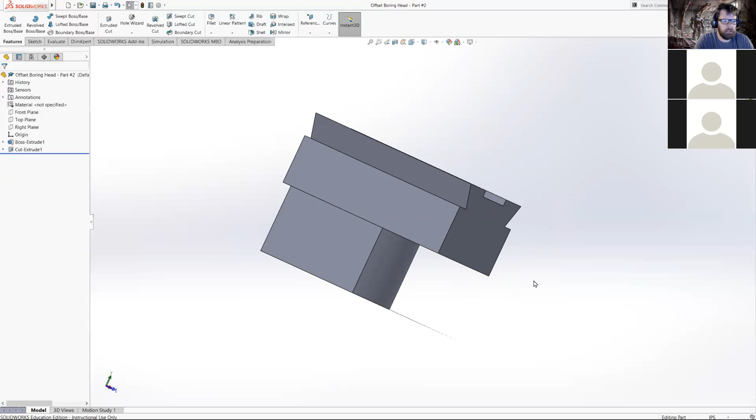Okay, alright. So today I just kind of wanted to review drawings a little bit, maybe go over how to create some drawing templates. And tomorrow I was going to see if maybe we could get into actually doing assemblies. But I think we'll wait until tomorrow for that, because I thought I had all these drawn, but apparently I didn't get them transferred over from my old computer onto this computer.

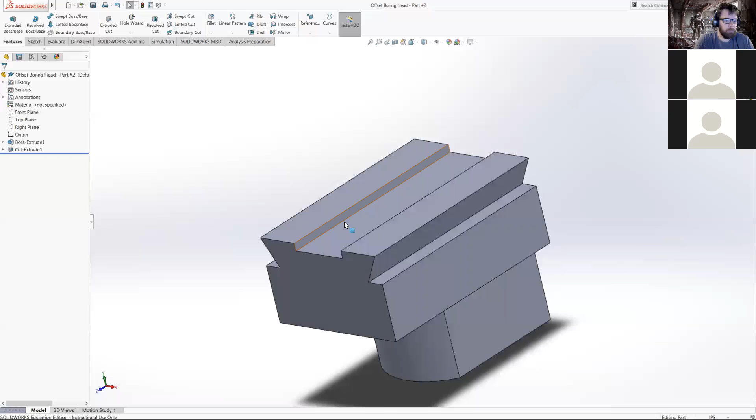So anyway, I don't have parts 1 and 2 basically, but it shouldn't really take me that long to draw them. Does anybody have any questions before we get started? No? Okay, so what I was going to do is part number 1.

If we look at part number 1 on the original blueprint, we have 4 views: front, top, right side, and an ISO. From there we can kind of switch some stuff around.

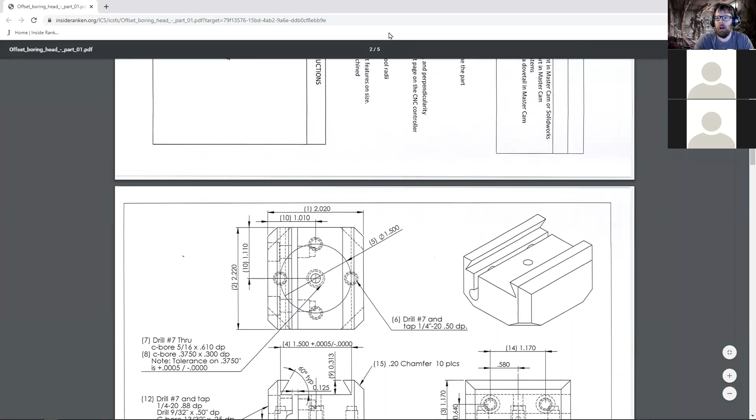So basically, whenever you're creating your drawings, especially when you already have an existing drawing like what we're doing, the easiest way is to try to copy all of the dimensions as well as you can. I did that, but I cleaned it up because it's just a nightmare to read right there. Yeah, too many hidden lines shown. Yeah, the amount of hidden lines is insane.

And kind of like what we did the other day, where I like to have hidden lines on 1 or 2 views. Right, but like this, I agree, it's just way too much.

But what happens lots of times is when people turn these in, they will miss certain dimensions. So when I grade these - right now, to be completely honest, I'm doing pass/fail for you guys if you haven't noticed. But when we do get back to a more normal classroom environment, what I typically do is have each dimension worth multiple points, so if you get the dimension wrong you get knocked off, or if it's missing you miss points.

And I've actually had quite a few students struggle with the blueprint making aspect of this, because they get in here and make their blueprint and then forget 3 dimensions, and all of a sudden that's 10 points off. They're not doing as well.

By far, that part and the second part are the hardest on the blueprints, from what I noticed. I was struggling pretty hard with that.

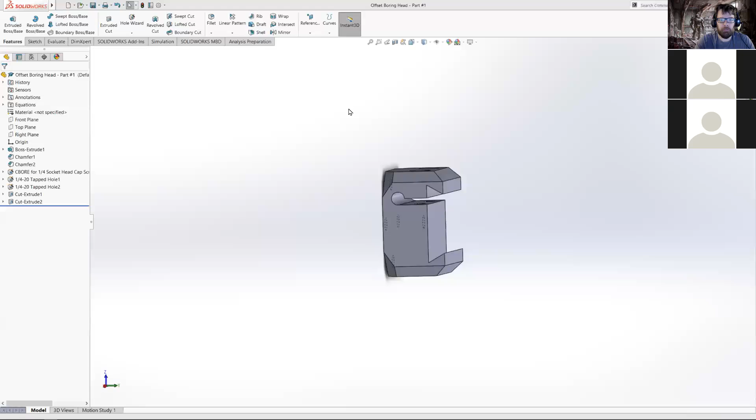So we're just going to basically duplicate part 1 into a drawing format. Before I get into that, we'll actually create a couple templates first. So we're not going to make a drawing from our part, we're just going to create a new blank drawing.

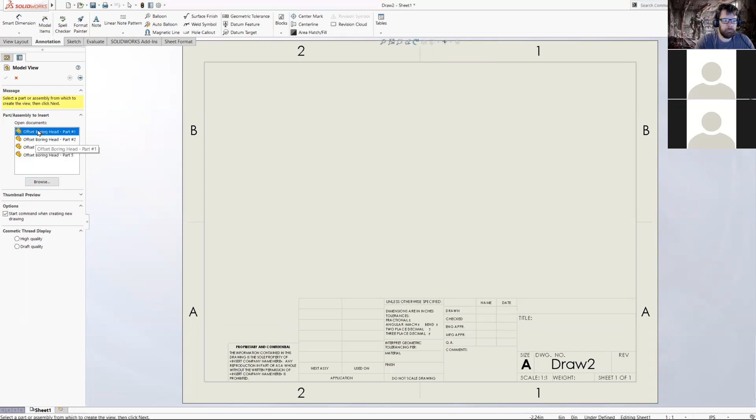And so you can do portrait or landscape. Landscape is typically the more common orientation. Alright, so right now we have our model view, because I did not select a part, right now we have this option over here in our model view.

So what this is saying is, hey, what part do we want to import in here? And I don't actually want to import any models in here. What I want to do is - oh, maybe not, maybe it won't let me. Alright, so let's see.

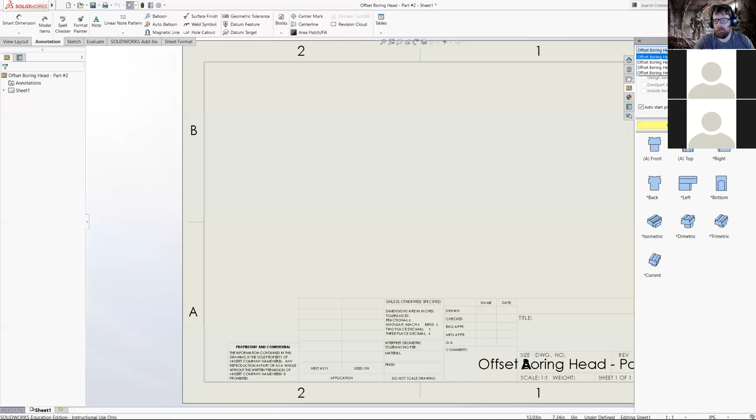Oh boy, I love when they cut off the words in these menus and you can't see what in the hell you're trying to pick. All right, so apparently I was wrong. I thought we could just drag blank views on there, but apparently we can't. So I'm going to go with part number 1, the one we were just looking at.

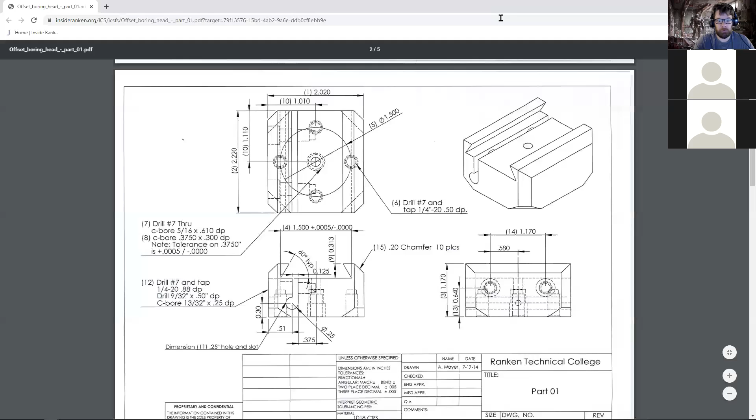So when we look at our blueprint, this is a pretty standard blueprint, right? We have front, top, right side, and ISO. So we have 4 views on there, 3 of which are giving us dimensions. So I'm just going to try to create exactly that. So because of how I drew this, my views are not going to match, right?

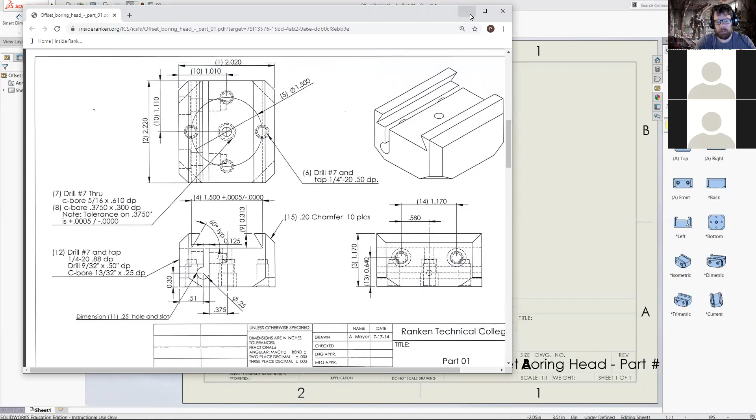So in my standard views in my blueprint, right, this is my front view, front, top, right side. Well, when I look at my view palette over here in SolidWorks, my right view is actually, because of the orientation I drew it, now my front view. Okay, so I don't want to use my front view just because it's my front view and start off with that. That's not how we want to do it. We really want to start off with the orientation that's going to best display our geometry.

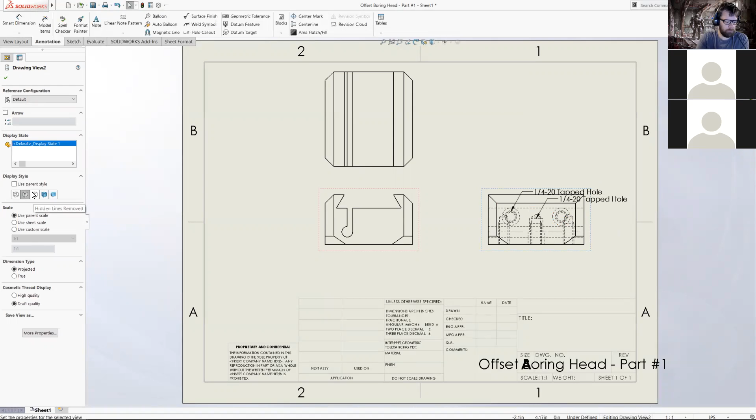So from here, all we really need to do is create our views. Right, and so in this case, I'm going to get rid of this right side view because it's not really telling me anything. The only way it's going to show me anything is if I turn on hidden lines, and like we said earlier, I like to avoid that if at all possible.

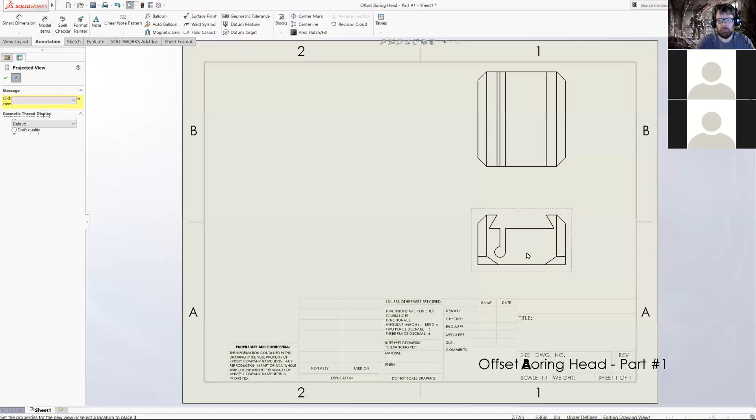So instead of doing my right side view, I'm just going to change this into my left view. All right, so it's still the exact same information displayed, just mirrored basically. And then from here, we're basically just going to orientate these views around into a good spot. And then if we want to change some options here, like our document properties, if I want my default units to be in 3 decimal places, now is the time to change that. If I want to change my angles to no decimal places, or yeah.

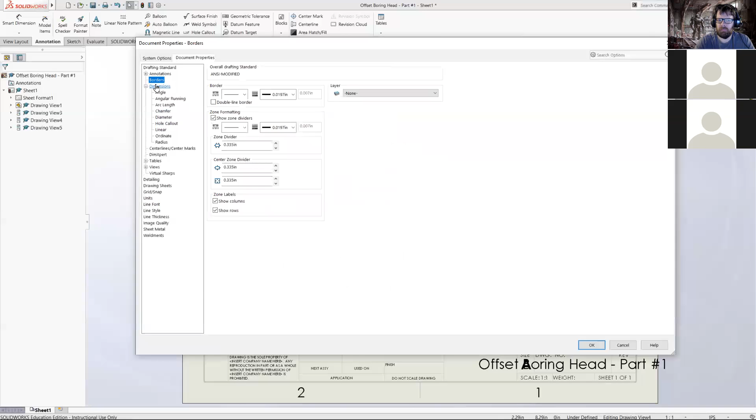What's the difference between doing it that way and going up to dimensions and changing in there, or is there a difference? Oh, like changing it up here? Yeah. So this is going to change depending on what kind of dimension you're talking about. So, well, I guess technically it shouldn't make a difference. Just a different page layout, kind of. Yeah, now that I think about it. Because that's the way I was going about it all last night, just going to dimensions, changing the primary precision there and the dual precision as well. Yeah. No, you could do that. It shouldn't be a problem.

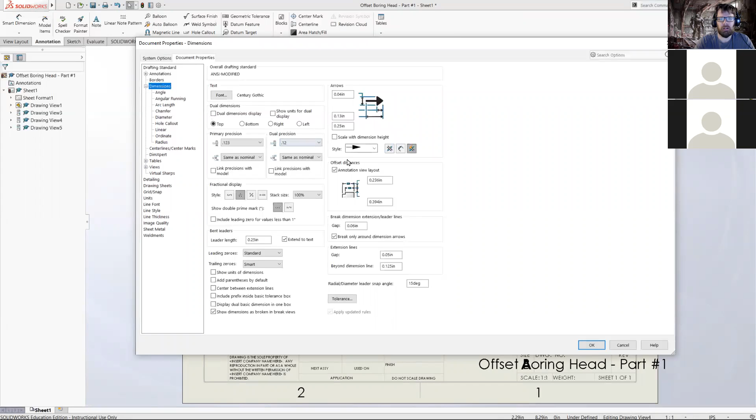The only thing is, I think this is only going to change the dimensions that are drawn on there. So if you had a hole table or something like that, it's going to give you 2 decimal place dimensions for the locations and the hole sizes and all that stuff. So this might be more inclusive, but if all you want to change is your dimensions to 3 decimal places, then you could definitely do it there. And also in that spot, you can change how these are displayed. And so at this point, we're pretty much done.

Like I was saying the other day, I always like to change my ISO to just a little bit smaller. It's because you're not really using your ISO to get dimensions off of. You're really just using it to get a better view of what this is. Right. So usually you don't need a whole bunch of room on it.

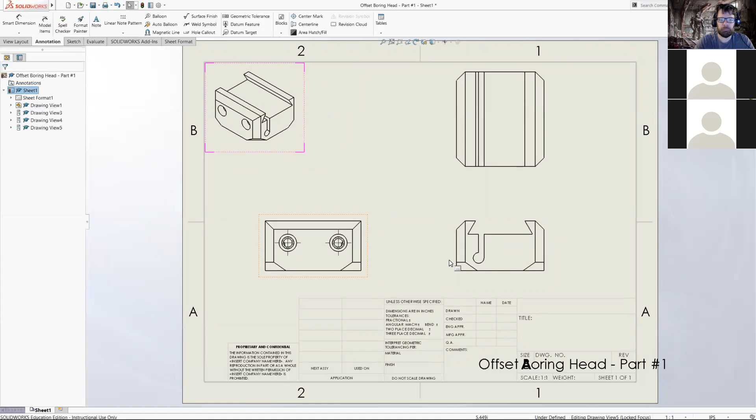When laying out the views, could you lay out the bottom view instead of top view, possibly? I'm sorry, what was that? Would it be possible for us to switch to bottom view for top view when doing these? Oh yeah, absolutely. So when you decide what views you're going to do, really you're basing that off of what best displays the information about the part.

Like this top view right now, it gives us some information on width, and we can kind of extrapolate some of the slot width and all that stuff, but it's really not showing us anything about that hole or our cross holes or anything like that. Or the bottom is where there's that 4 bolt hole circle pattern. Yeah, exactly.

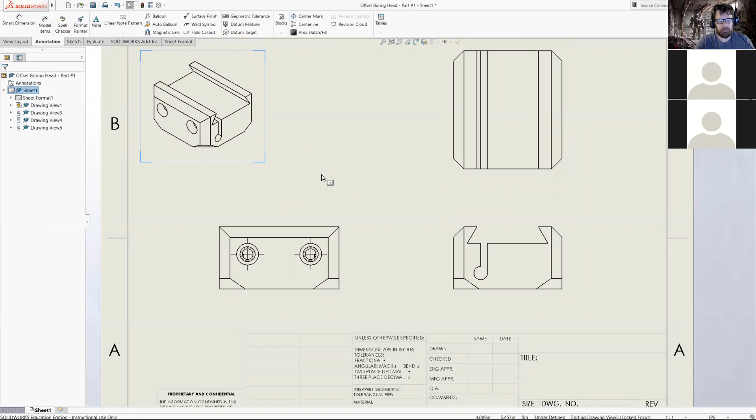So, whichever view you choose is basically whatever you feel displays that information the best. So, there's not a real hard and fast rule on what views to use and what goes where. I take that back. I'm sure that there are some hard and fast ISO type rules for this, but for our purposes, we're not getting into that depth.

I don't expect any of you to go out and be draftsmen. So basically, as a machinist, I guess the bar is pretty forgiving.

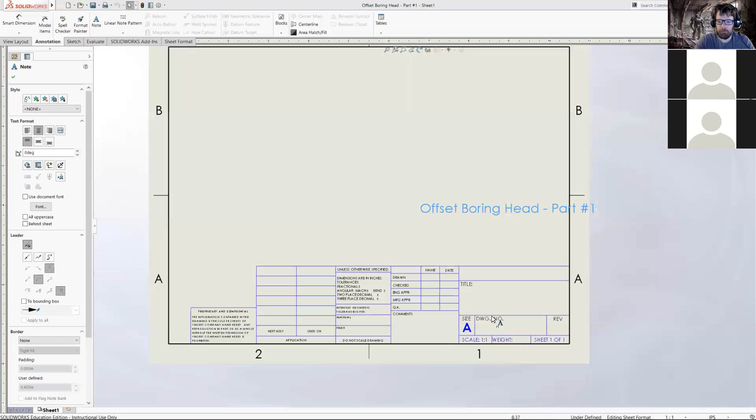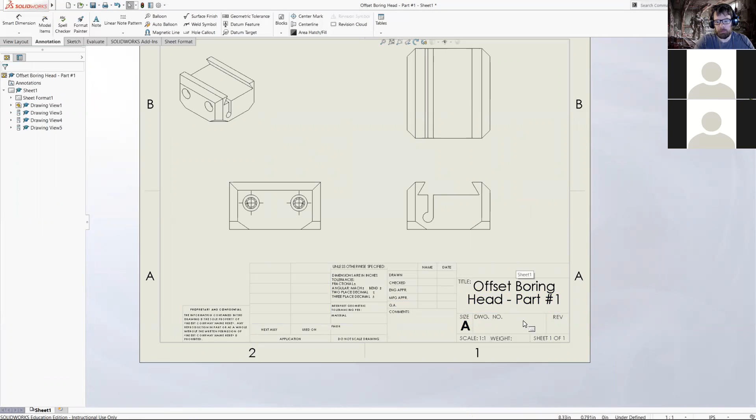So the other thing I like to do, like I did the other day, is change my title block so that my title is actually referencing what this part actually is instead of being down here in the drawing number and going off the page. Lots of times you'll have to change the font size in order to fit this, right? Obviously that fits in there okay right now, but this is just a text box, just like a text box in Word or all sorts of different programs.

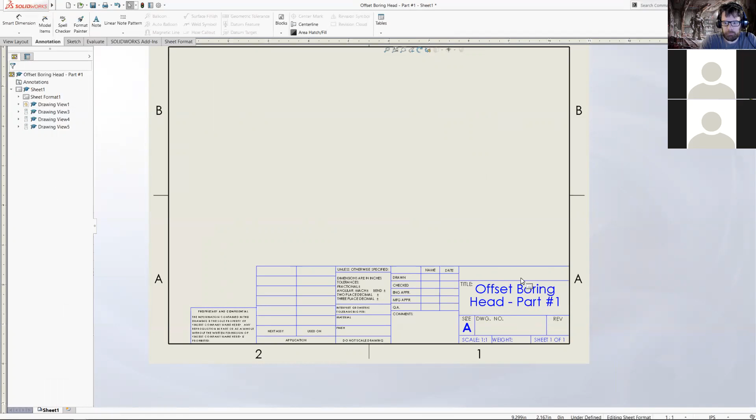So if you need to adjust this, all you really need to do is either click on your text box and go to your feature manager, and you can change the font there. For some reason this takes forever to load. You can change your font just like any other program, or you can double click in there, right click, and font. You can change the font there as well.

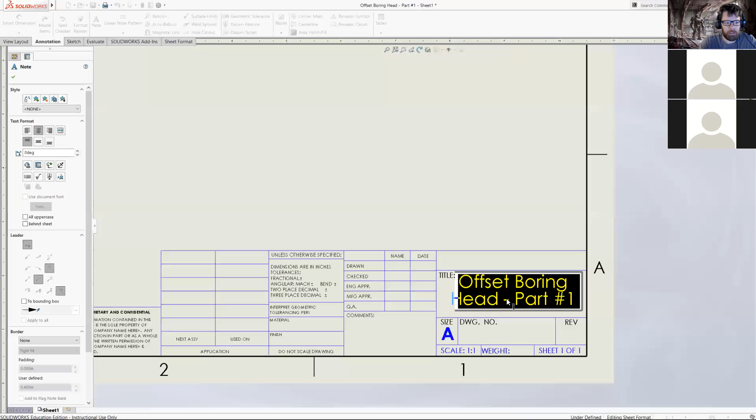Now that I think about it, if we're creating a template, that might not be a bad thing to change, right? Because I don't want to have to come in here every time and change this around. That is a 24-point font, so it's pretty damn big. So I can change it to like 16-point, and that makes it much smaller. I'm going to adjust this text box a little bit. So now if I have a file name that's significantly larger, it'll still fit in there. I won't have to go back in and edit after the fact.

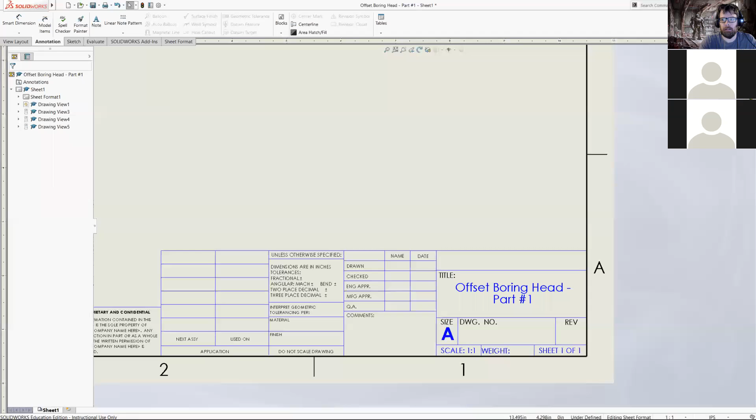And then this is also where we want to adjust our tolerances. Now, for you guys doing class, the tolerances are obviously not determined by what you put in here. So it's not the most useful thing for you to do, I guess, is what I'm trying to say. Oops. There we go. If you hold down Alt and do 0176, that's the degree symbol. Took me a little while to figure that one out.

And actually I just realized that that's not a degree. You can also scroll down in your side menu on the note over there. Oh, left, yeah. There was an option, I think, at one point. Yeah, it is. You can do insert symbol. So if you do add symbol, you can say, I'm going to add a plus or minus, regardless of feature size. Those aren't the notes that I'm used to. So anyway,

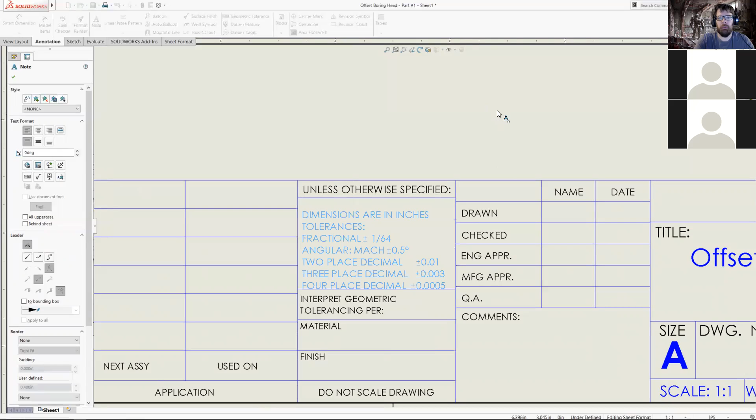So we can go there, angular, so it's going to be 0.5 and Alt 0176. So my two place decimal is going to be 0.01, 0.003, and then for four place decimal, let's say that's 1 thou or a half of that. So let's try to center that a little better. All right, now we have our tolerances. We basically have our whole template set.

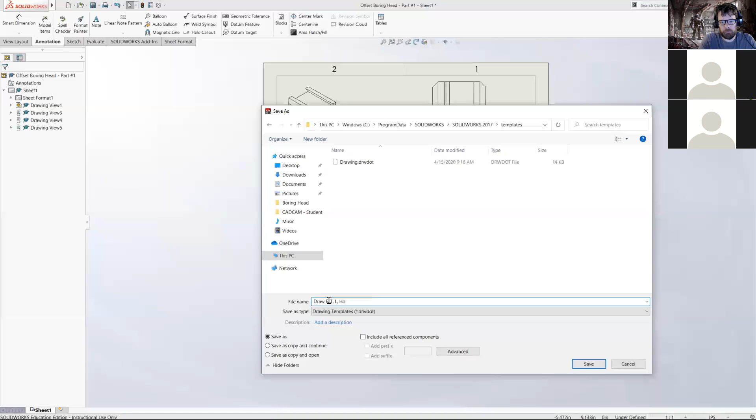So now I'm just going to do save as. Oops, I'm going to get out of there. And I'll do file, save as, drawing template. And again, it's going to change to my template folder. I'm going to call it draw, and then F for front, T for top, and left side view, ISO. So I'm basically putting in information here. I have my drawing, I have the views that are in that drawing, and then I'm going to put the precision for the numbers, or the resolution.

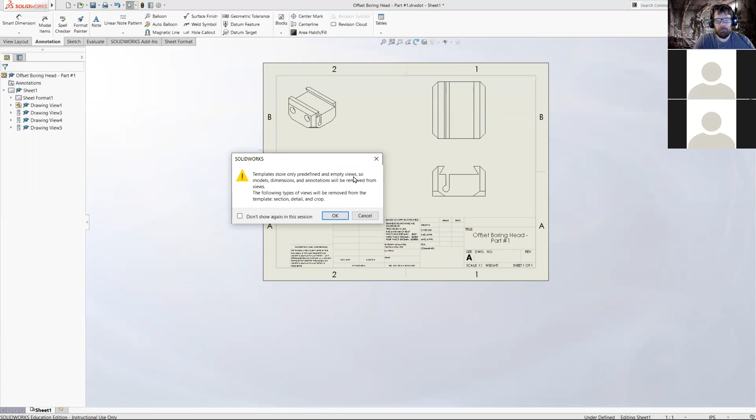So what just popped up, right? Templates store only predefined and empty views, so models, dimensions, annotations will be removed from the views. So what that's saying is when I open this up, it is not going to bring in my offset boring head part number 1 into this view. It's just going to leave it blank, right?

So there we go. Now I can still move these around. Well, maybe not. I thought I could. So I can still move those around, still adjust layout and that sort of thing. But what you'll see, hopefully, where's that? So let's say part number 5. If part number 5 opens. There we go.

So let's say I want to make a print based off of this guy, and I don't want to go through the whole trouble. So I can actually just do my make drawing from part assembly, and now I just select that template. And what that's going to do is it's automatically going to import those views into here, and it might put them in kind of a funky position too.

All right, so whenever you make a drawing, and you've probably noticed this already, it locks alignment. So right now I cannot move this left or right. It is locked vertically with this part. And that's just basically a drafting standard, and usually you want to keep that, right? But it really makes zero sense at all to have an alignment lock on an ISO view, because we're not lining up any of these lines.

Having these lined up can really be helpful when you have a print, because you can lay a ruler on there, right? We've hopefully all done that in blueprint reading class, where we've laid a ruler or a straight edge down on our print to make sure that the features line up, or things are what they look like. But it really doesn't make any sense with an ISO.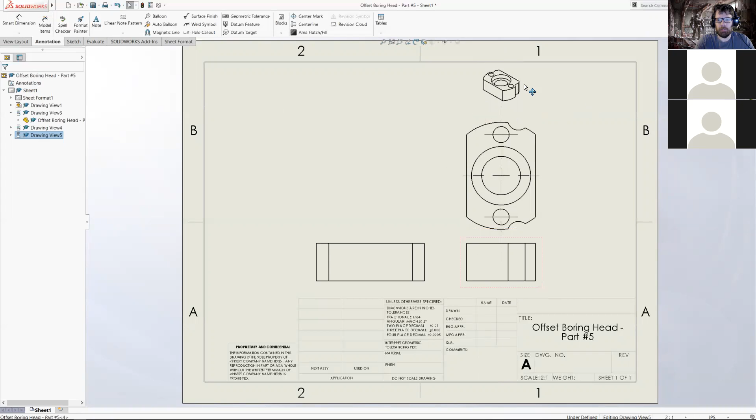So what we have to do there is break this alignment. Right now this is aligned vertically. I can't move it horizontally, but it will move vertically. So what I'm going to do is right click on this feature. Really, I can right click anywhere in this view, and the view is defined by this little orange rectangle around it. If you right click anywhere inside that and go down to alignment,

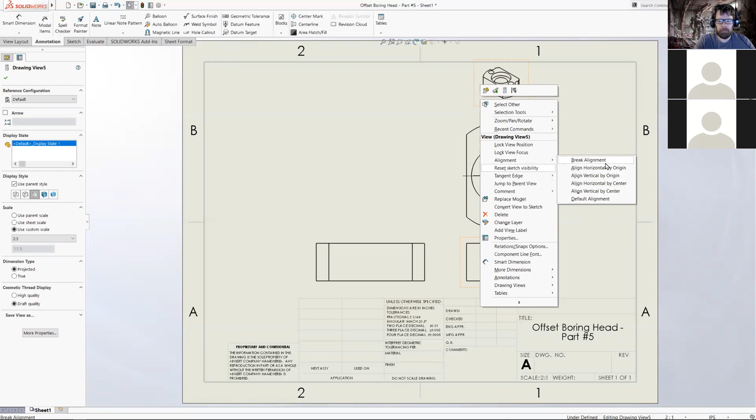we can align these, right? So if I wanted to align these parts together, I can, but what I want to do here is break alignment. So I'm going to break alignment, and now I can drag this wherever I want it to go. Awesome. So that makes life a lot easier. Yeah, that just helped me out a whole bunch.

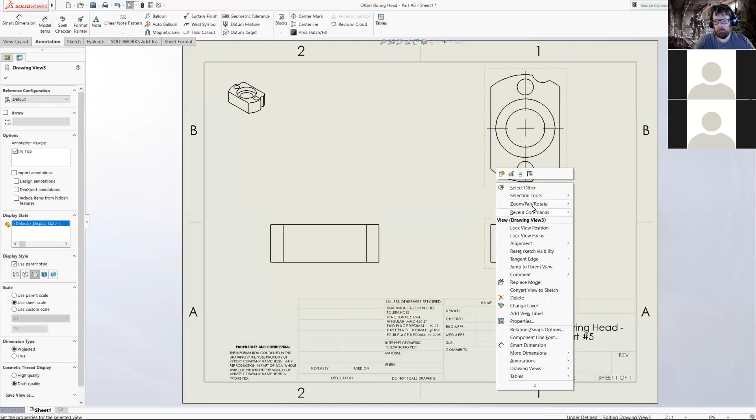Good, good. The other thing that you can do: this imported our views, but maybe this isn't necessarily the orientation that we want. I would probably rather have this view here or here than somewhere else. So what we can do is actually rotate these parts. Same thing, if I right click, I can zoom, pan, rotate. I'm just going to rotate view. And what this will do is I can drag this and rotate it around,

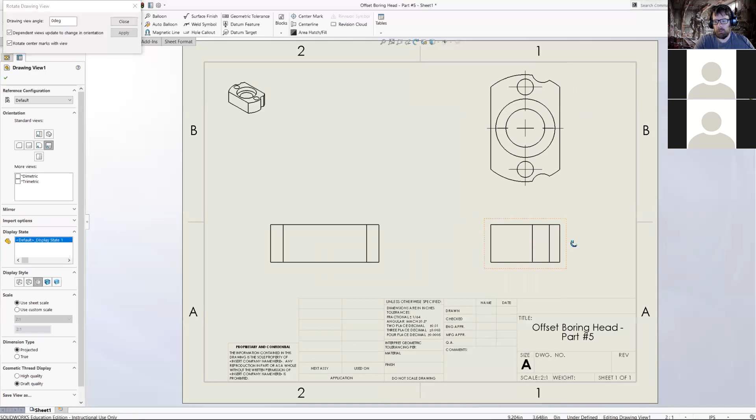and oops, no, it didn't do it. All right, so what I can do here on my original view is rotate this guy around, and that's going to change my other views. Oh, whoa. Right, so this is a really good way of being able to adjust our views a little bit and get a little more information about what we're trying to do, especially on a part like this.

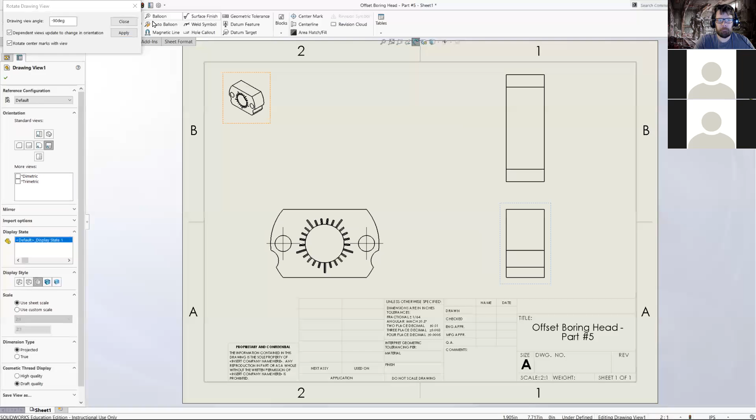We don't really need that many views. Two views would be more than enough information here. So for this part, even though I imported into a 3-view or technically 4-view part, I'm just going to delete one of them. And so now we have more what's needed. We don't really need the entire model.

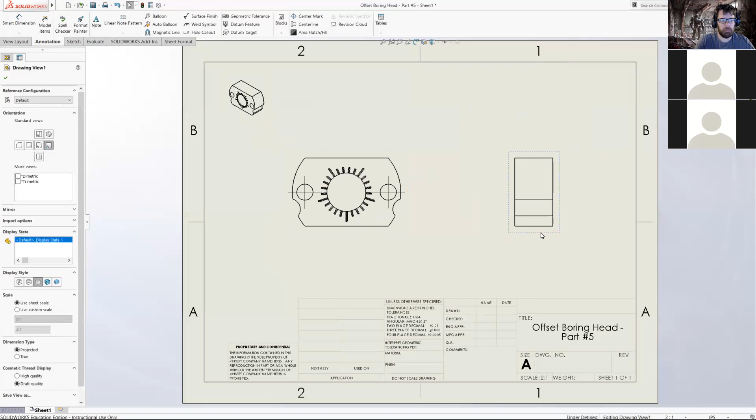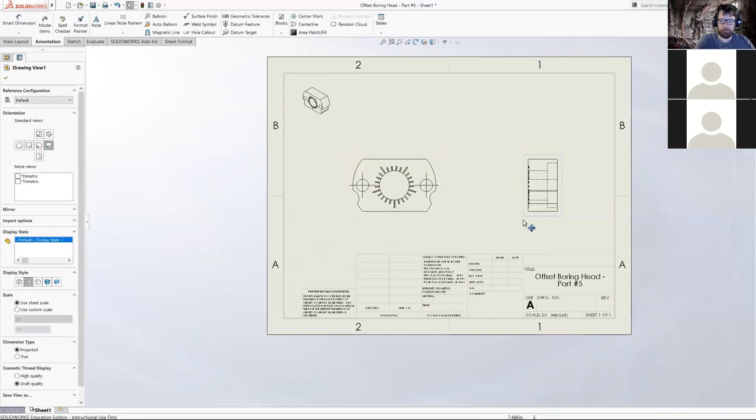So in this case, I would unclick use parent style on both my ISO and that view, and then click on hidden lines, and now I can see the counter bore, the through holes and all that stuff, but my other view isn't cluttered by it. I still have my tolerances, my title block's looking a lot better, and from here I can adjust sizes. Since this is a smaller part, it doesn't make as much sense to use the same size, so I might want to make it bigger.

And then from there, same thing as the other one, we can hit model items, import features into all views, entire model, and then click OK, and it's gonna throw our dimensions in there. And just like before, we can go through, adjust, make things more clear, and so on.

So I'll just save that, click OK. And one more thing with blueprints that I haven't really talked about: to save as something else, we can just save natively as a PDF. We used to have to export as a PDF or do a print PDF sort of thing, but SolidWorks added this in quite a few years ago.

Is that something we ought to be doing when we're saving it to our U drive or whatever? No, I have SolidWorks, so I'm not worried about it. But if you're trying to use these for personal stuff, or you're worried about having access to this computer to print something off, that's why I always put stuff in PDF format for you guys, so you don't have to open up SolidWorks every time to view a print. Also, these SolidWorks files can get pretty large, so PDFs can save a lot of space. All right, so let's save that.

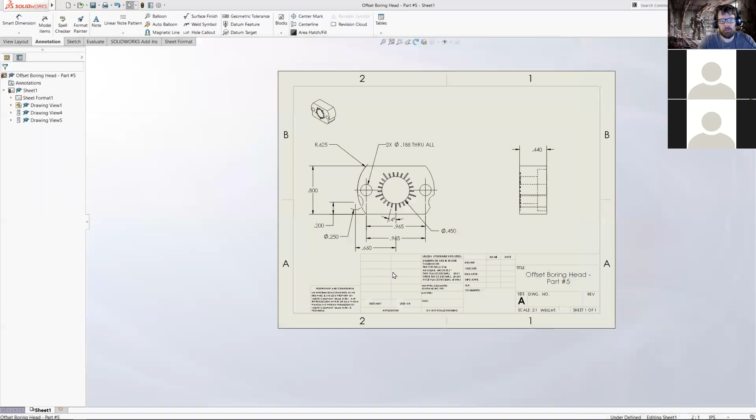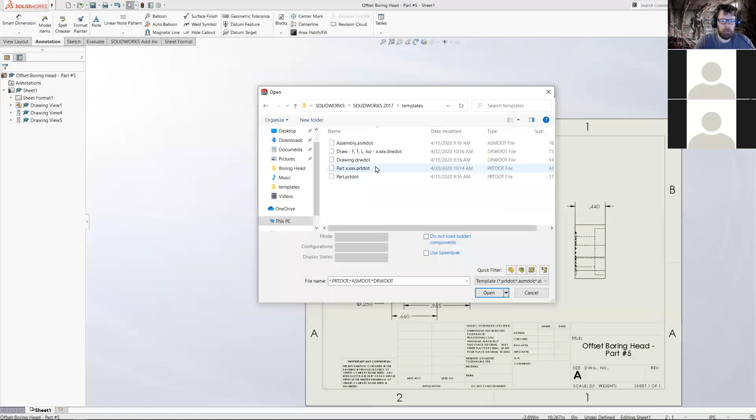So now what I'm going to do is alter my... well, SolidWorks crashes. All right, so I'm going to open the template. Again, when I go to open, I can just select the type of file that I'm going to look for. For almost anything, it's going to look in the last place that I saved or opened something. One of the cool parts, when I open up template, it automatically takes me to my template folder. So I'm just going to open up my

4-view drawing, and all I'm going to do is save as, and change this from front, top, and left to just front left. The other thing you could throw in here is landscape or something like that. All right, so I just changed the file name. That's really all I changed, to front left. So I'm going to get rid of my top view. All right, and that's it.

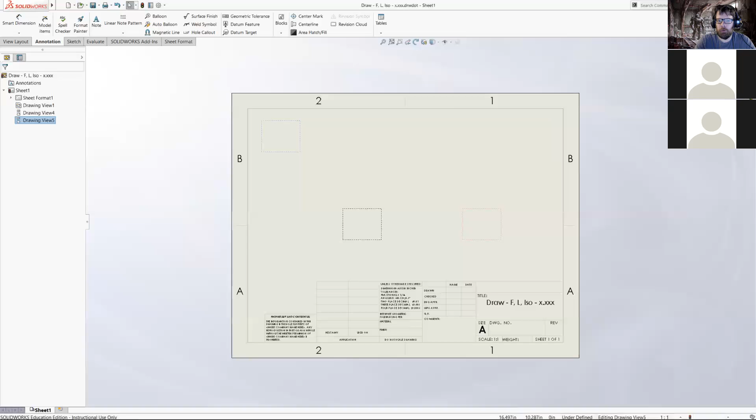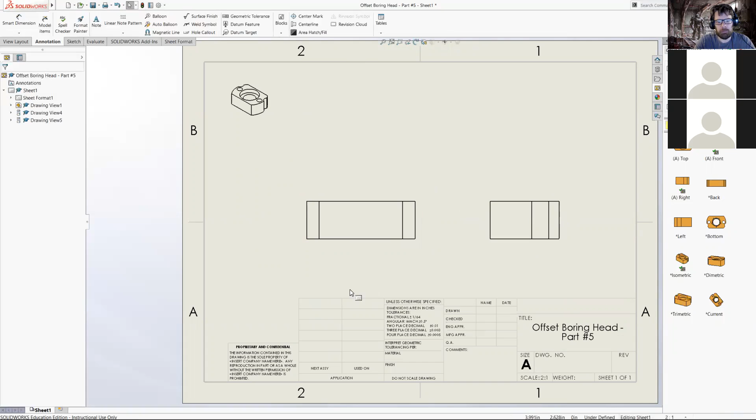I guess I'll break that alignment. It shouldn't be aligned with anything, but it almost seemed like it was a little bit. So all I changed was that. I'm just going to click save, and that's it. That is how you do drawing templates. So now if I did that same part again but chose a different template, it's going to be the exact same part. It's just now, instead of having 3 views, we have 2. So pretty straightforward. Don't save.

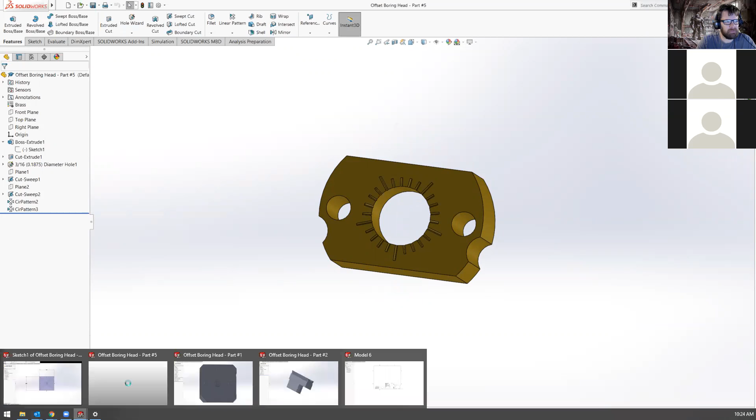All right, I apologize. I wanted to get into assemblies today, but I just don't have all those parts drawn. I think I need 1 or 2 more. So I'm going to call it a day and get those drawn so we can get on assemblies tomorrow, how to put together assemblies. So unless anybody has any questions...

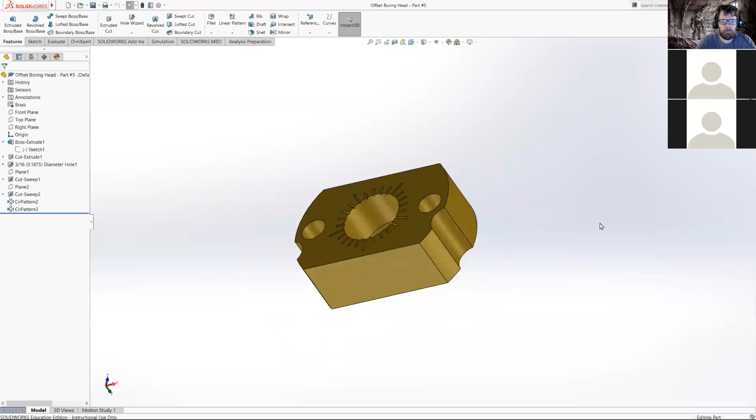I have a question for you. Yeah, absolutely. What's up? When we make that brass piece, would that be when we have to tap it internally? No, this doesn't have threaded holes on it. These are just through holes. Then the other one that goes along with it, we had to put a 40 tap on. Oh, okay. I believe that is part number 6. I don't have that one drawn either. Let me pull up the print. But yeah, we have a 3/8-40 tap.

When you tool path that, you might have to create a new tap. Yeah, I just had to edit the 3/8-16 or whatever the standard is, and tell it that I had 40 threads per inch. Yeah. That's really the only thing you have to double check, to make sure you have the right tap and the right feed on there. Other than that, it's just like using any other tap. All right, thank you. No problem.

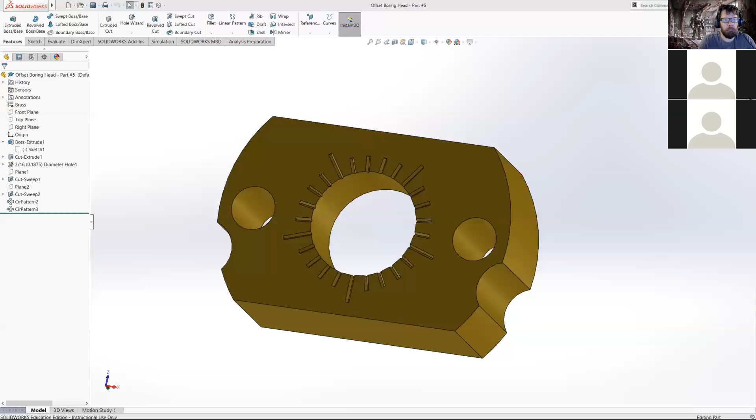So you answered my one question regarding saving blueprint templates. Is there an easier way to pull a drawing view off? Say you've got your front and you pull down, you've got your side. Can you pull from the side over to get the back? Yeah, here, let me show you. We'll create a print for that guy. I think that's actually the part. Oops, that's new. All right, so new part.

No, that's not what I was looking for. Not a good print, but what can we do, right? So it doesn't really matter. I'll just select that. Use custom. Oh, I forgot about that.

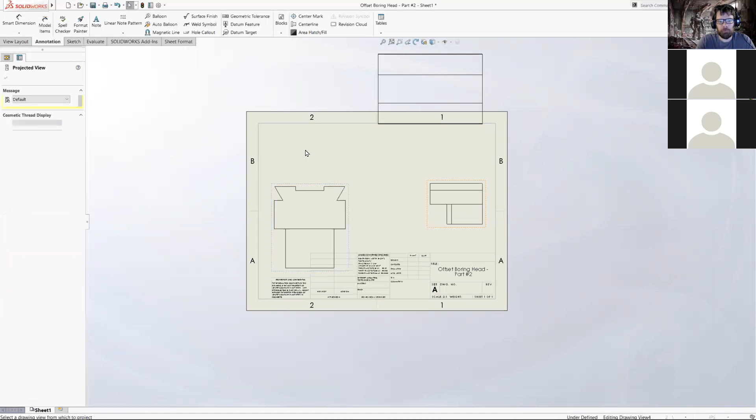All right, so this is always one of my favorites, when you don't lock the sizes to each other, but the alignment's locked, and it's like that doesn't make any sense at all. So right now this is our parent view. Right. So basically all we do is right click on another view and do a projected view, and now we can do a projected view off of that.

Awesome. Okay. Yeah, so that's all you need to do. It's actually really straightforward. So you're not confined to only doing that projected view off of your main view. Yeah. Okay, cool. That's all I needed then. All right, great. Thank you.

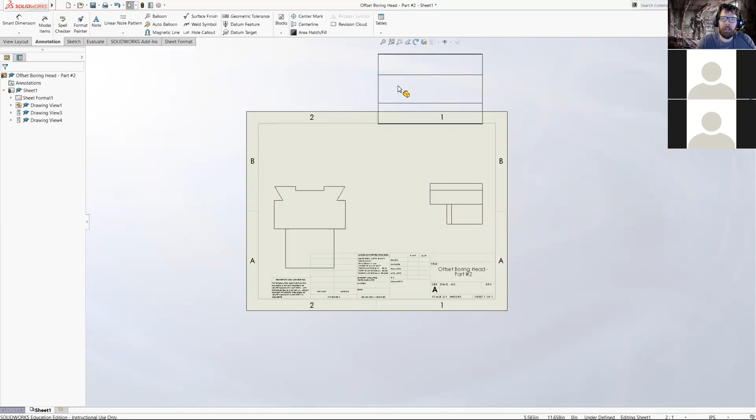Good question. All right, guys. Well, that was a good 30 minutes, I guess. So yeah, tomorrow we'll be going over how to do an assembly. I guess next week's assignment will be getting into some assemblies, but no assemblies will be due this week. So okay. Are there any steps we could take to start figuring that out before class tomorrow? Of what, assemblies? Yeah, just kind of play around.

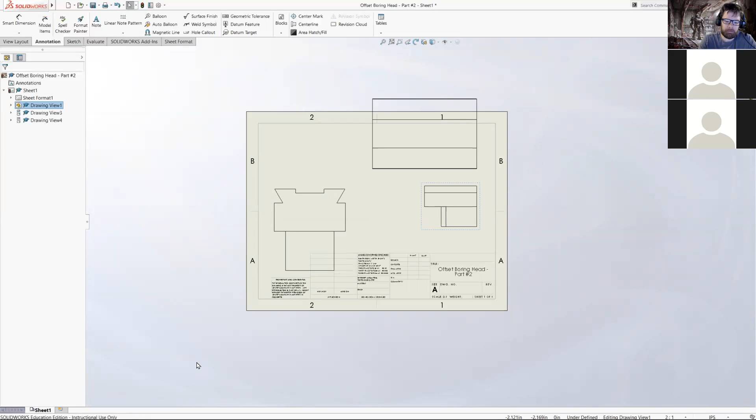Sure. Yeah, the big thing with assemblies is, think of it like with your drawings, everything has a relation. Everything is the parametric part of it, right? So you have to create those relations from sketch to sketch, or even items in a sketch. You're basically doing the same thing with assemblies. It's just instead of relations, they're called mates. So like a coincident mate would be like if I took, well, here I'll just do a quick one.

So let's see, I got this part here, right? And I want to create an assembly from that part. So the first spot it's going to dump me in, in my dialog box over here, it's going to have begin assembly, and it's going to have a choice of whatever parts I currently have open. So right now, offset boring head part number 1, if I click anywhere out here, it's going to place that part. If I click there, now it's going to place part number 2.

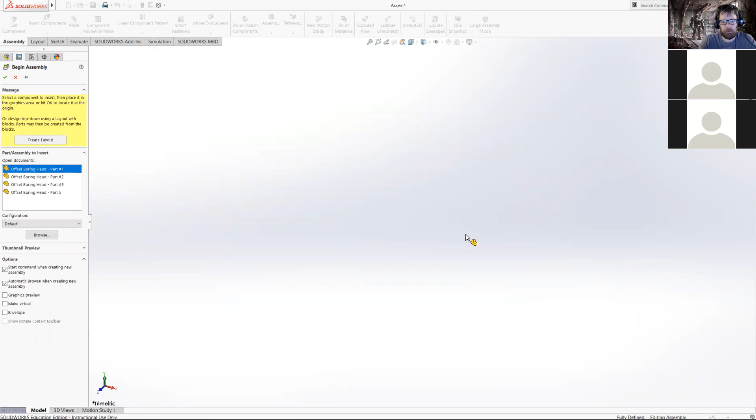So I'm just going to start off with 1, and then, right, 1 part doesn't really help me in an assembly. It's just basically a part hanging out there. So I need to mate that to something. So if I take part number 2, right, I have 2 parts out there. One of them is fixed and one of them is floating. So if I take this, I can drag it around.

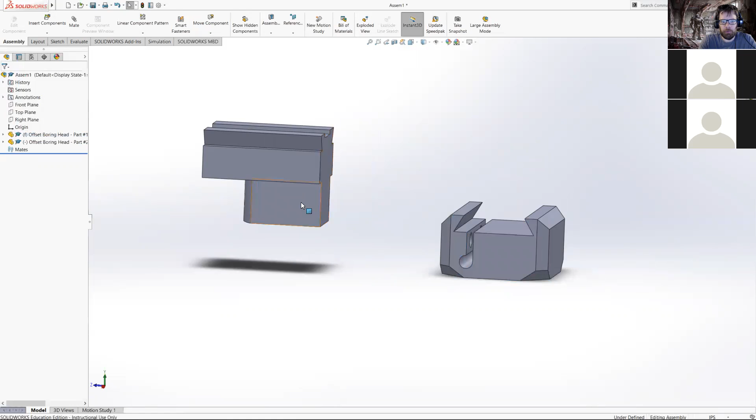I can make those intersect with each other. It doesn't really matter. There's no collision detection turned on right now. So it's not going to stop me or say, hey, you cannot do this. It defies the laws of physics. Lets me do everything. Now this guy, I cannot move him because it is fixed. And that's really what you want to do.

If you don't do it like this, inevitably your models or your assemblies will come out misaligned. They won't be normal to any of our XYZ planes. They're just kind of twisted and off in weird space, which when you bring that assembly into another assembly, things can get even weirder. So we want to try to keep one part fixed. It doesn't really matter what it is.

But then if we think about how these parts interact together, right? So we know this has an external dovetail that goes into that internal dovetail. So if I put this in here, what would define that relationship? Well, this dovetail is going to be centered in that dovetail. And this dovetail is going to be able to slide back and forth. So basically that's all you do is you create those relations.

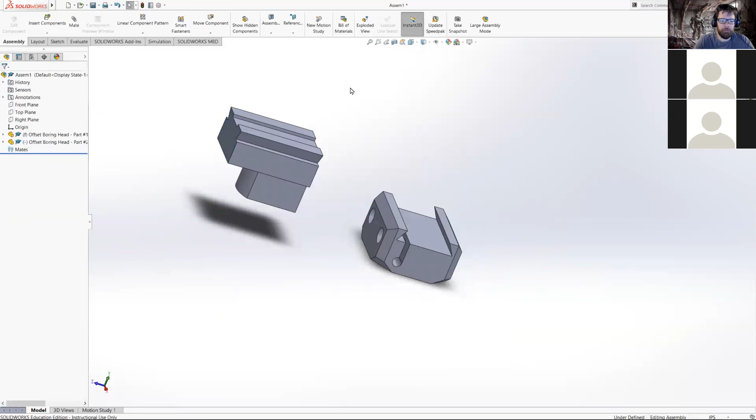There are more complex ways, like we could do this with a width mate, but that's kind of more complex. The easier way to do it is just with the most common mate, and that is a coincident mate. So basically what you do is you select your geometry that you want to align, and we can either click on our little paperclip icon here, our mate icon, or you can come up here.

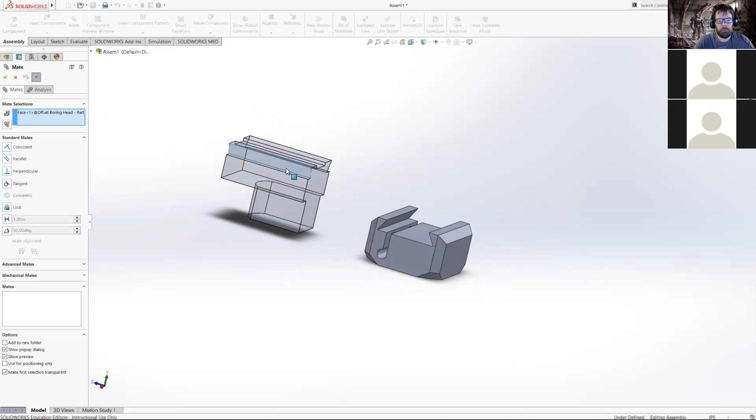Doesn't really matter, it's still the same button. What we will do is say this side is going to be coincident with this side, right? Which it just did. Did it do it fully, right?

Functional, but yeah, it doesn't really help us out a whole lot. So what we need to do is add more mates.

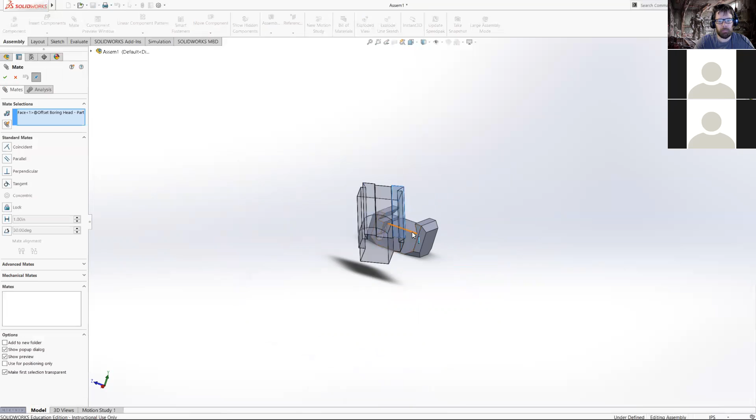Well, if I say then this is going to be this bottom part, right? When that goes through that dovetail, this is always going to be parallel with the bottom of that. So I can create a parallel mate with that. But there's the problem, right? It's upside down, it's the wrong way.

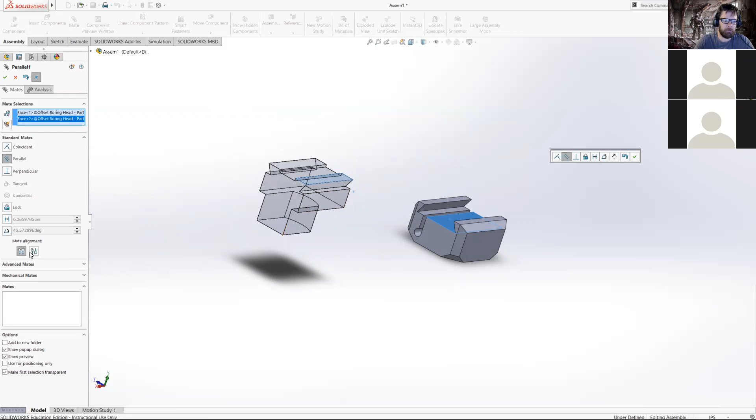So what makes this a lot easier is if my part is more aligned just to start off with. But there's always this button down here, mate alignment, right? So what this is going to do is right now, this is parallel. It's true, right? We are parallel, but we are parallel in a way that we don't really want to be.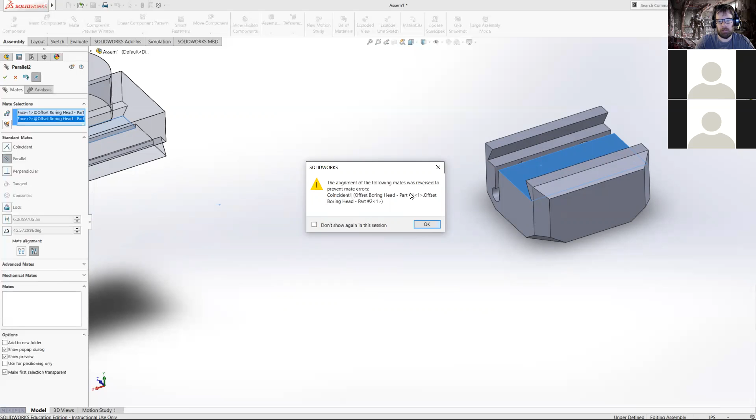So what I can do is click on that. I can create, I'm going to keep it parallel, but what I'm going to do is switch it in that direction, right? And so when I did that, it also had to change my coincident. I had to just flip the alignment on that coincident orientation that we had earlier.

But now I'm at least getting closer, right? So I'm actually going to change this parallel to coincident because that'll make my life a little easier.

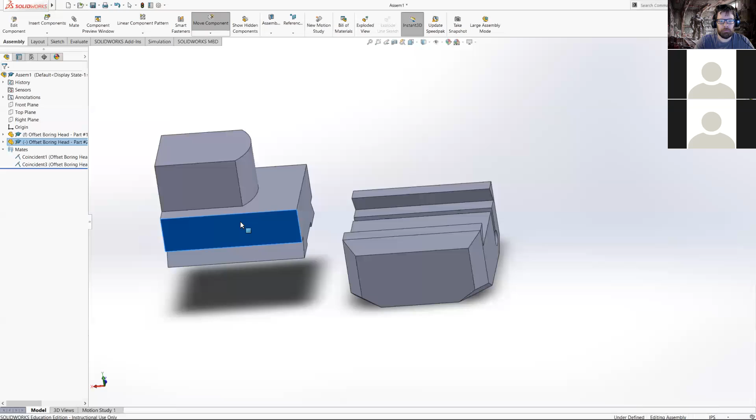Neat, right, and so now it can still go back and forth, but the problem is it can still slide 20 feet out of my assembly. Yeah, it can disassemble, violent disassembly.

So there are other mates that we can use to kind of limit that motion. There's what's called a limit mate, which is in your advanced mates, but we don't really need to get into that right now. Basically, all you're doing is going around creating these relationships between your parts.

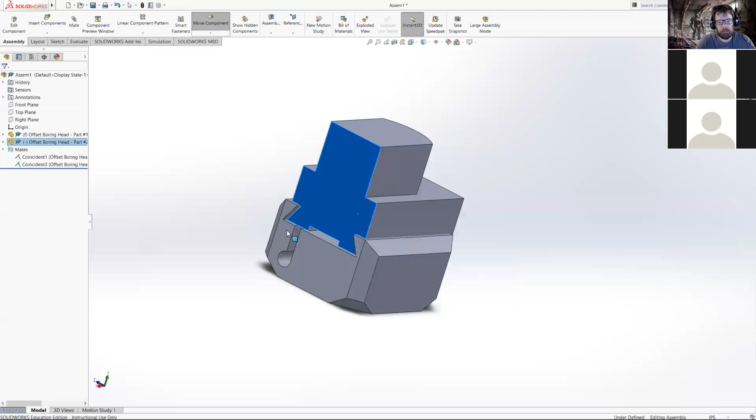And then, so yeah, I guess is it going to tell you if something doesn't line up right, like if you've got a dimension wrong, or I guess we can talk about that tomorrow? That'd probably be a little more complicated. Yeah, I mean, well, that's kind of what our evaluate tools are for.

Okay, so like if we wanted to know interference, right? Our selected components are basically just our entire model because I didn't have anything selected. But if I had, say, 15 parts in here, and I just wanted to see do these two parts interfere with each other, I could select both of these parts and then calculate, right?

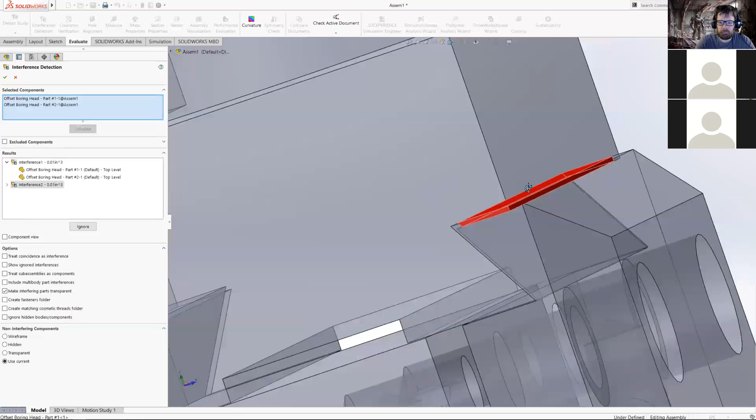So right now we have interference of, it says 0.01. I don't believe that. No, but we do. All right, you can kind of see it there.

Right, so that's detecting that interference on there. So obviously I don't have something drawn correctly. Well, it looks like you may just have to mate the bottom of the dovetail on the top part in that view with the top of part one. Oh yeah, I see what you're saying. Yeah, so that was my first coincident mate.

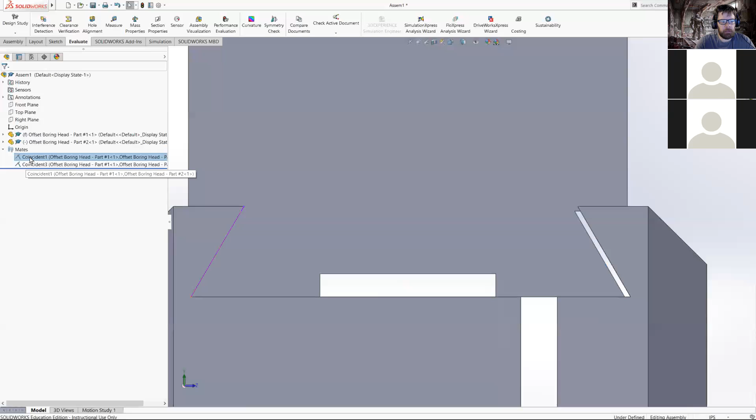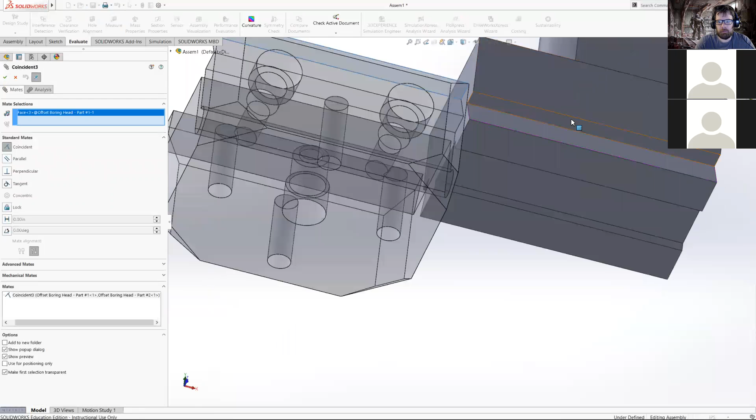So I can actually go back in and edit this feature. So now instead of being those two, well I guess those two surfaces have to be, I guess it'd be my second one. So right now it's these two surfaces. So I'll just clear that out, which gets rid of that dimension, and I'll select that side and that side, shifts it up.

There we go. And now, oops, if I do my interference detection, no interferences. Cool, yay.

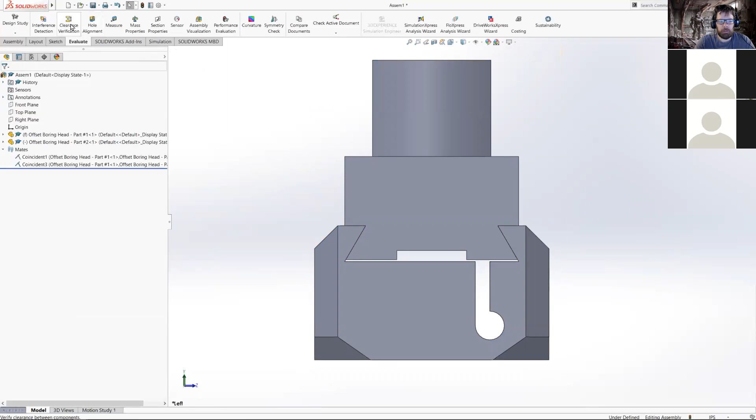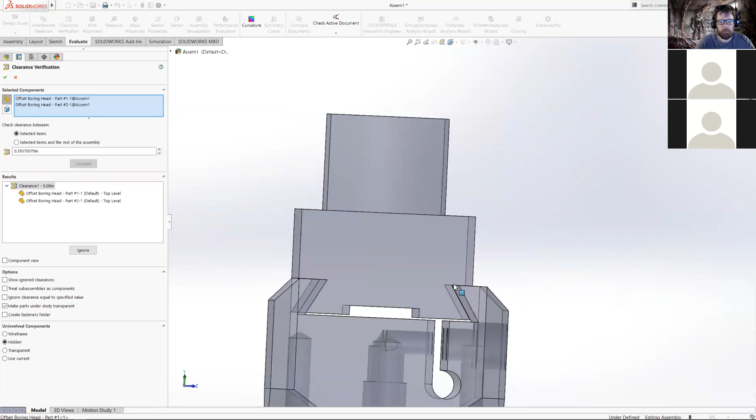But clearance, if you're worried about clearance between two parts, right, you can also do clearance verification. It's basically going to do the same thing. It'll tell you how much clearance we have in between these two parts and all that stuff. Like this guy, we got 60 thou clearance in the bottom of that slot. So yeah, that's basically how you do the clearance and all that stuff.

You can check hole alignment, that's kind of handy. But yeah, getting into the evaluate tools, you really start getting into some pretty heavy stuff here, like the analysis, simulation, FloXpress, all that stuff can really get into like motion studies and all sorts of cool stuff.